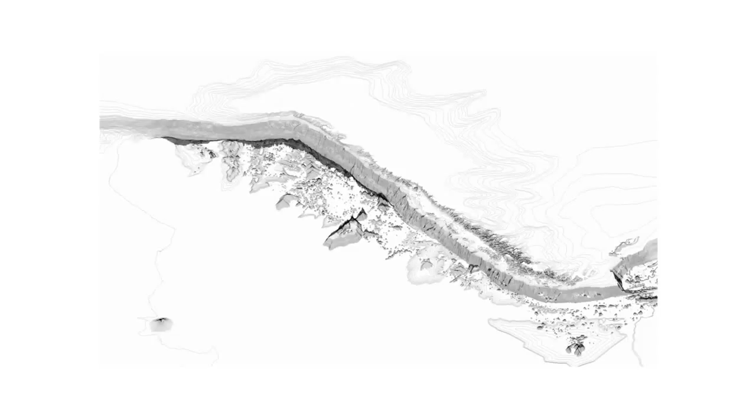We made, for example, this map. This map is the real Chile—not just the flat long line that everybody knows. It's the real one. We have problems in Chile with earthquakes because we have this sea that is really deep, I mean 7,000 meters deep, and we have the Cordillera 7,000 meters high. This difference in elevation, it's the problem of Chile.

The students designed this map over one semester, working out all the levels and everything. One of the maps shows the 'where is here.'

All of this is the sea. And it's so incredible because they must draw in the map from the NASA drawings that they could get, and they draw in all the terrain. And Chile, you could see more or less the Chile. But the beautiful thing here is not about geopolitical Chile, it's about geographical, that we have, that is really important, you know?

Okay, this is the sea. You have 7,000 deep here and 7,000 high here. Here is the Cordillera, and that was an interpretation. But the levels are changed. We exaggerate some distance. We use some images of Superstudio to recreate some structure that you could find in Chile, like a new landscape.

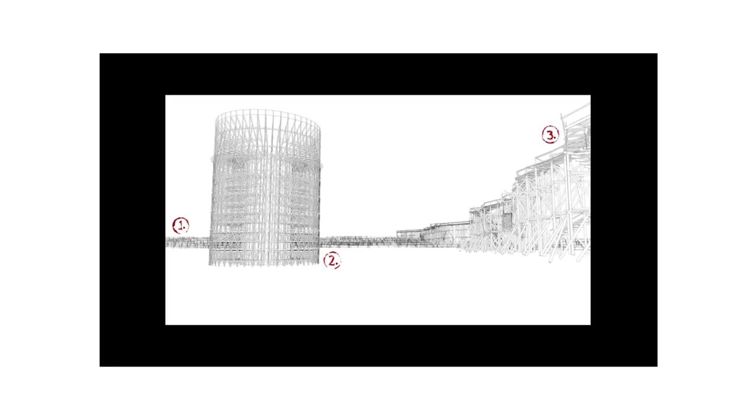Or we use this poor circus family to draw in a football game the map of the circus. Just to say the circus always chooses to be the football soccer.

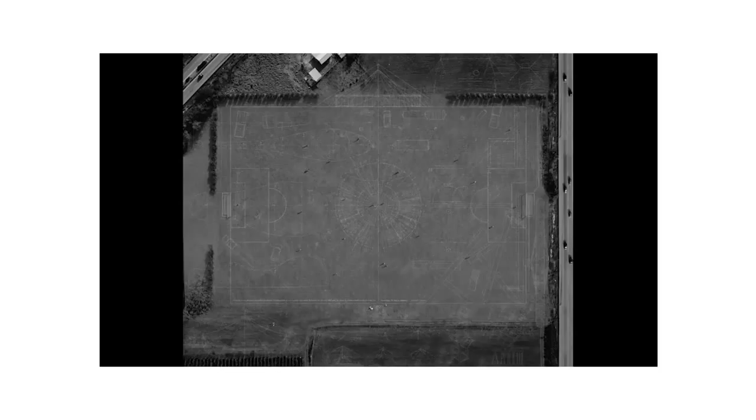Or we made research about the homeless routine that is explicit here. And then if you see the scale of the research, they are really different.

Or we explain the Patagonia, when the hunting kills the giant Patagonia people here, like with the picture, the fresco by Mantegna in Padova, and we explain all the changes of the terrain in there. These have to have an explanation of what is wrong or what is happening in the territory of Chile.

Or maybe we use Knossos plan in Greece to explain fair in Chile with the same language.

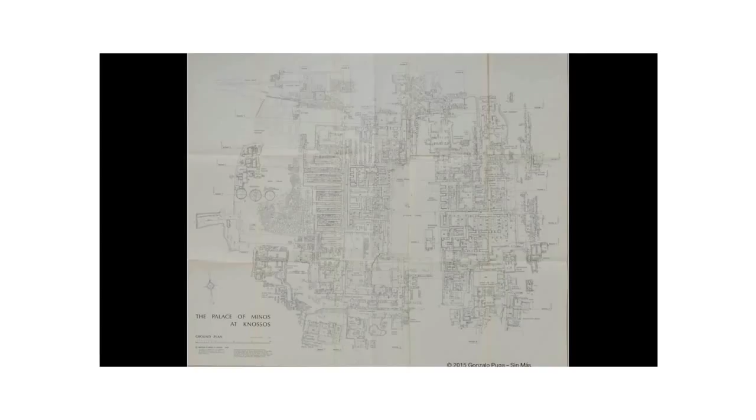Second workshop. You will see some other videos later, but this is the second workshop that I did in ETH with Christian Kerez. Christian Kerez invited me to do a workshop together last semester, and it was really exciting.

And I proposed to do something about Burda magazine. Maybe young people don't know that, but Burda magazine is Burda the fashion, you know. And my mom, for example, made a lot of clothes and garments from these kinds of patterns, you know.

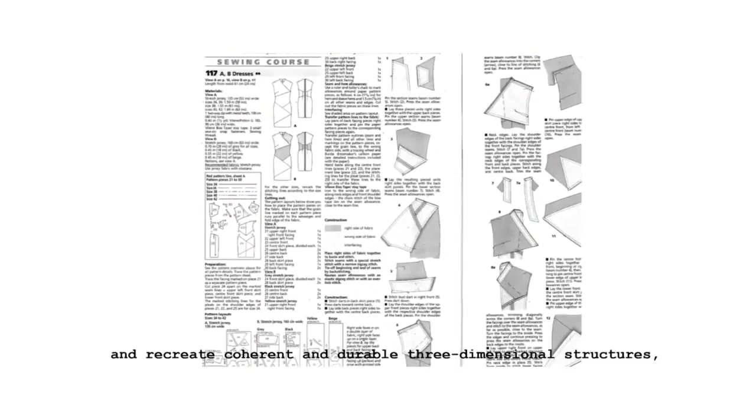Burda is the name of a German fashion magazine. Thanks to its simple instructions on how to use and cut sewing patterns, anyone can take an insignificant piece of cloth and recreate coherent and durable three-dimensional structures, like a dress, a shirt, or a pair of pants.

The charm of this plan lies in the possibility of it becoming a field of interpretation and knowledge.

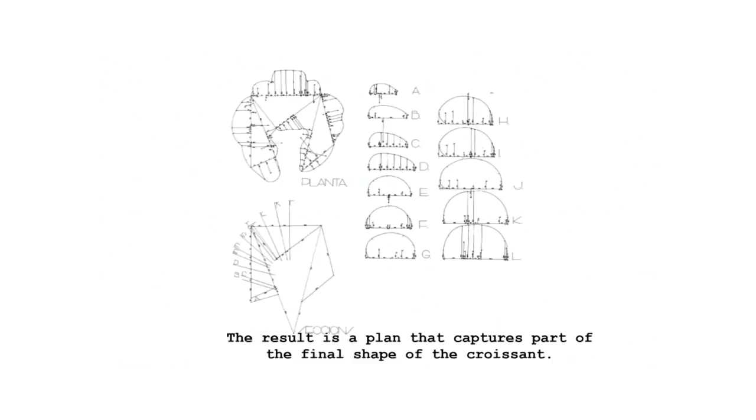Enrique Morales gave his students an exercise called How to Lay Out a Croissant. The result is a plan that captures part of the final shape of the croissant. No one can use these measurements to build a croissant. It lacks information. The real shape is lost among the cross-sections, and the structure disappears in the drawings. This is the same plan that would be used to measure a train car or a building.

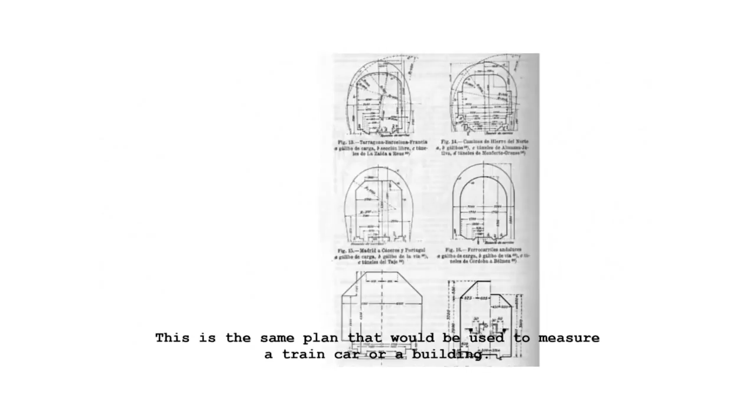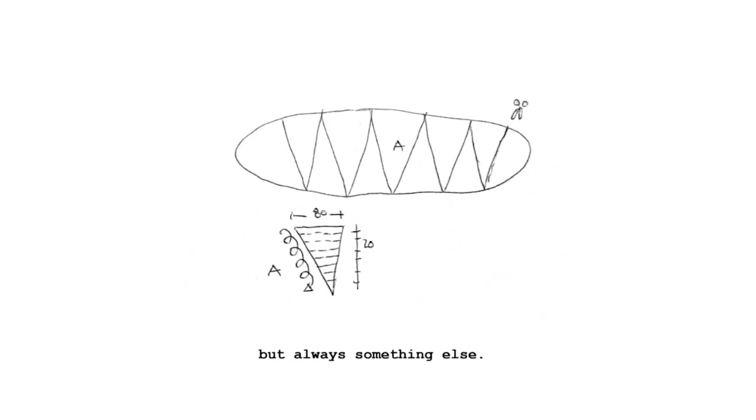But this is how a baker builds a croissant in a kitchen architecture. Perhaps with this simple cutout pattern and some instructions we could build a croissant, but always something else. The shape of the pattern has little or nothing to do with the shape of the final object. It has to do with the construction process.

The patterns and their instructions not only tell us of the production methods, accompanied by measurements and materials, they can tell us of the complete nature of the object. A pattern is the 3D reality of an object, flattened out onto a sheet of paper. Its effect is similar to that of analytical cubism in the photograph by Hockney. A refuge. A flattened refuge.

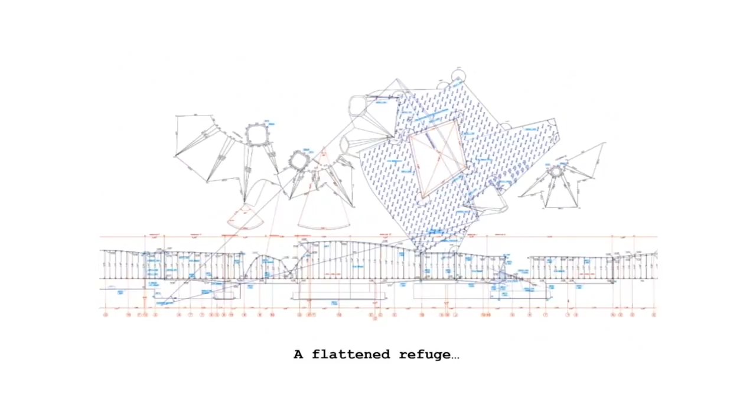This is the pattern of the hand of a giant designed by sculptor Max Stryker. Its shape wraps around a hand made out of masking tape, flattened by cutting it with scissors. The cuts follow the lines of the hand, achieving changes with natural shapes like the lines of the hands drawn by Eduardo Chillida.

There can be many different patterns to achieve the same effect. The important thing is that the instructions must be correct. If they are not, we may only attain a deformed reality. And what we want is to attain a new informed reality.

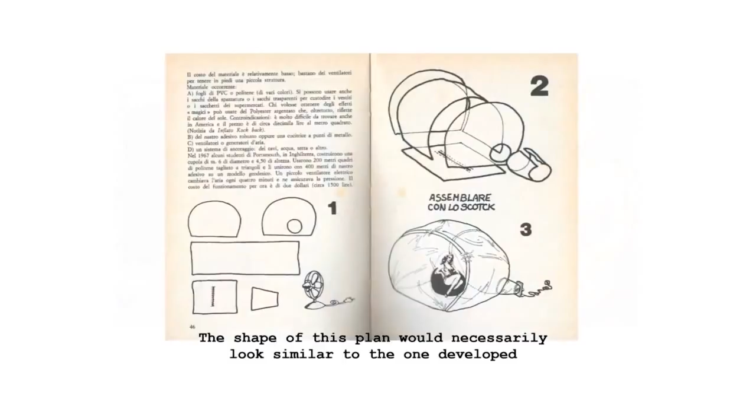What would the pattern of another hand be like? Like that of a cheap blow-up doll, essentially made from the same materials as the hand by Stryker: plastic and air. The shape of this plan would necessarily look similar to the one developed by Ant Farm for an instantaneous refuge, rough, practical and effective, like the blow-up doll.

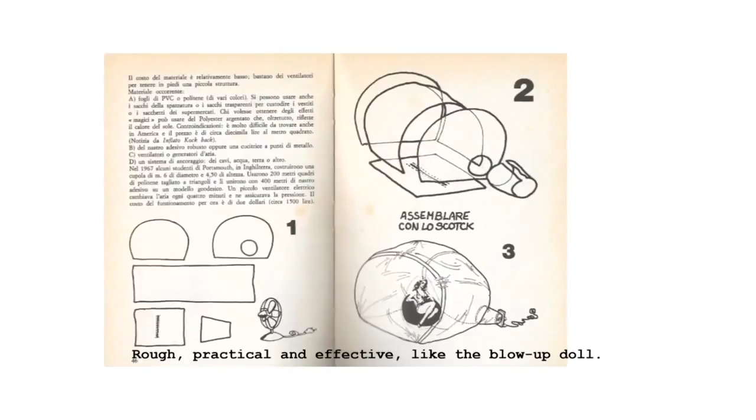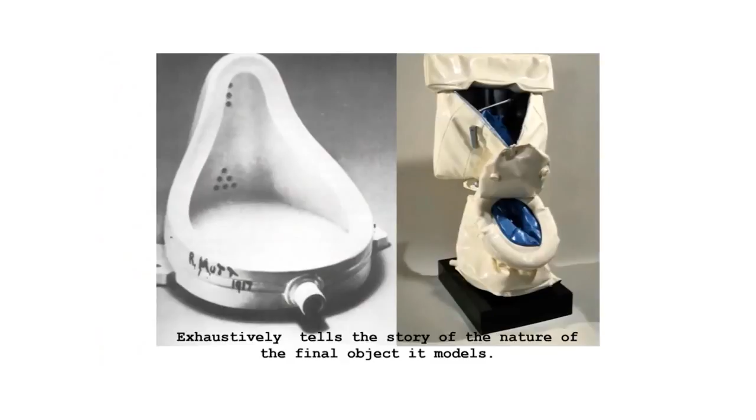This example helps us understand that the two-dimensional plan of a sewing pattern exhaustively tells the story of the nature of the final object it models. It is a construction tool. What does it construct?

But to wear clothes is to wrap up warm, to envelop, hide, support, create imaginations. For Michael Webb it is also to bring together and to isolate.

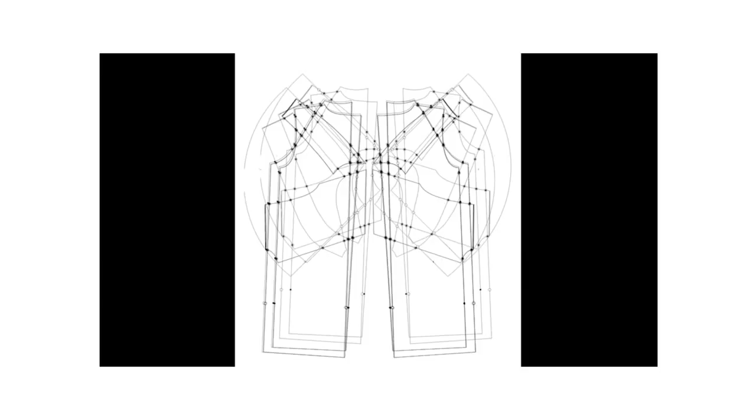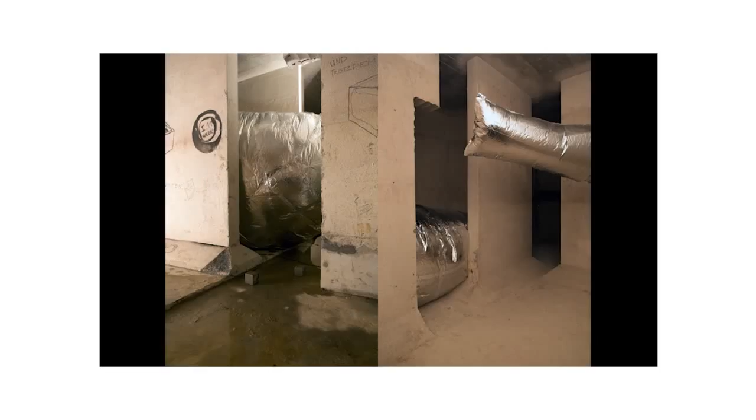This was 2 to 3 weeks, and the second exercise was a hidden space. A hidden space is a space which is inside of another one and has to be hidden. We wanted to build with ephemeral materials, and there was a lot of problem because in Switzerland everything is prohibited and dangerous, you know, and you could not do anything.

After 2 weeks, the student asked me what we could do, because the fire committee or the security committee doesn't want us to work in that way, and they had to do it illegally, you know, everything. For example, this example was underground in the climatization rooms, and they put some volumes of mylar, and you could pass through like a labyrinth of things.

The sensation of this fragile construction with the structure was really beautiful. This was in Zurich, it was built in helium, and you could go inside at this point, just hanging from this bubble of helium on top. Or, for example, this is a hidden space where you're not hidden inside of something, just your head. But inside there is humidity, and you feel real light, another kind of atmosphere, and then you feel really inside another world.

At the same time, we chose to do a park - a Burda park, we call it - but it's something in the middle of a building and a park. It's just to think how we could express our relation with nature at the end.

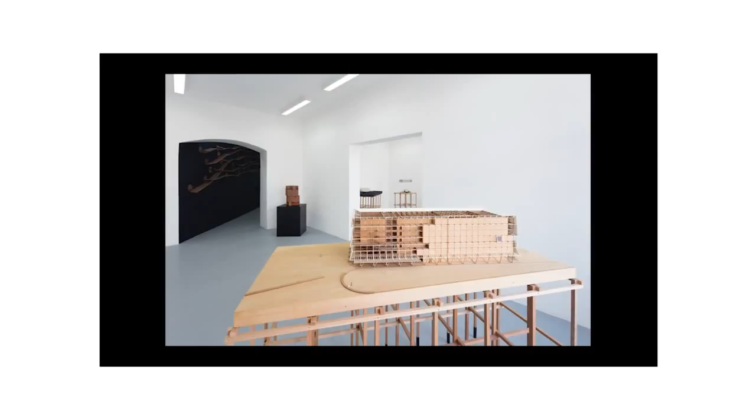This is about my bestiary, all of my projects, the last one from 2010 to this time, and this is one project I will show you, called Dead at Home. It's a small chapel - this is the theater I will show you later. And these are some drawings: Serpentine Gallery, room 2 is a small house, the house for the poem.

And at the end we have this family of objects, all of them. I always do a conference with this exhibition that explains the relation between them. There are real projects and there are objects that will never be built.

This is my last one, made for Gallery Ma. It's called Kipwi, the name of my first tower - the tower that I will never build. But I will do a video with this doll named Kipwi, fighting with Godzilla. I could not do it at that time, I still have to do it.

The next exhibition will be in September. It's about Enrique Miralles. It's really important for me to have a relation with architects that I really admire. I made contact with the Miralles Foundation, with Benedetta Tagliabue, and said I would like to show the Inestable, the table by Enrique Miralles.

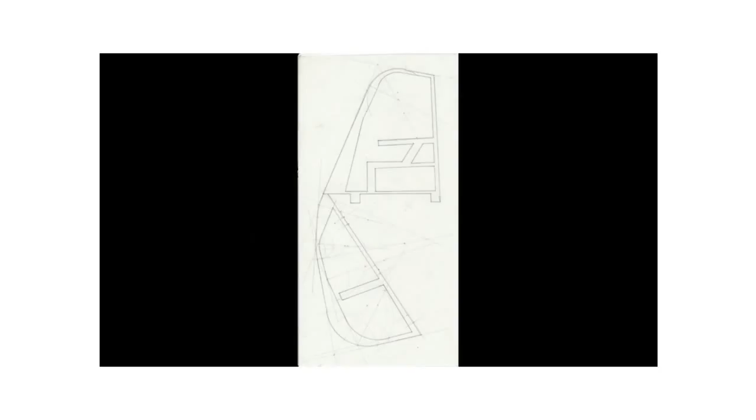We received this beautiful drawing, made by hand by Enrique Miralles, and we made a research about this building. For me it's a building because there are many parts of the drawings that don't exactly match how it was built, so we had to choose some ideas, but at the end we just built it. This is the real one.

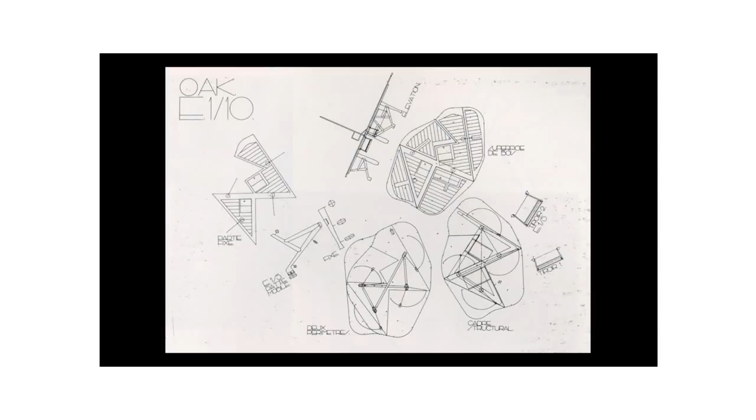This is the table that we produced in Chile. The name of the exhibition will be Inestable, made in Chile. This is the table - it's so beautiful, really incredible. I really feel that just the materiality could give you the real sensation of things.

The other things are just talking about it, just to think about. But the materiality, you don't need to think - it just is. And the third exhibition is really beautiful for me.

The third exhibition we're going to do will be in May of '68 at the ETH school institute in Zurich, with Hans Ulrich. It will be really beautiful. The name is Cloud 68, about radical architecture. We have a collection of radical architecture from '52 to '74.

We are going to bring this European architecture - drawings, lithographs, engravings, many models that we have in Chile - back to Europe, and make this exhibition in April '68. They will be just papers on a cloud, and Hans Ulrich will give us the voices of the people who were there at that time.

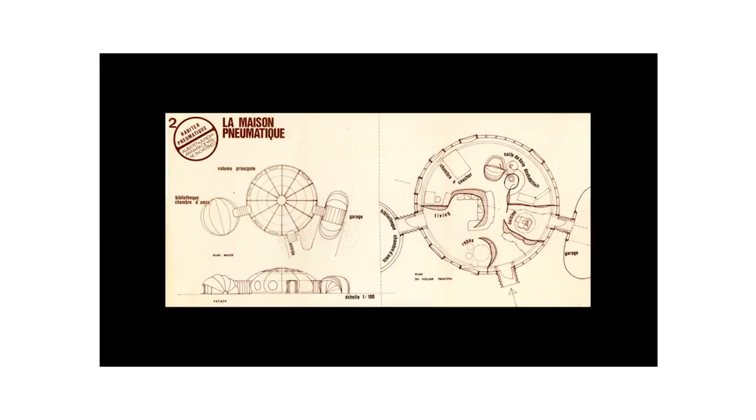We are going to have voices on paper of the Situationists, Constant, and about Superstudio, Archizoom, Archigram, or Utopie from France - more or less 300 pieces, 250 pieces from different figures like Buckminster Fuller, etc. This small collection will be here, then come back to Chile. Because, as we discussed today, for me the important thing is to bring architecture to Chile, not to export Chilean architecture outside.

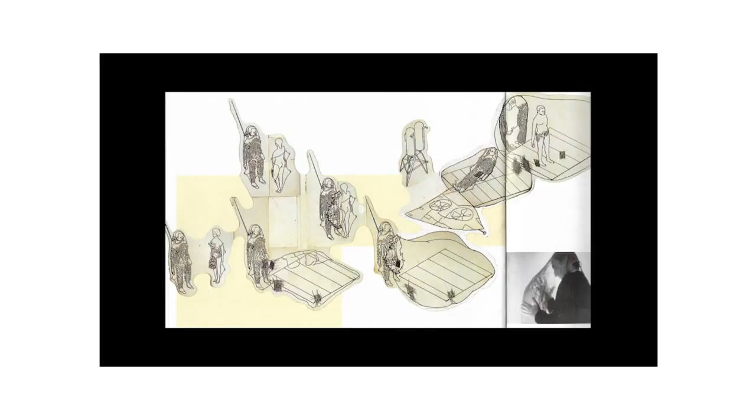Everybody thinks you could travel around the world and it's really easy to do. But in Chile, we have more or less 40 schools of architecture, just middle class students, and these students could not go far away. So my opportunity is to bring architecture to Chile.

And this architecture is just paper. The paper for this kind of architect was really important because they don't build so much. I think the exhibition will be so beautiful, and you must go there, because for you it should be easy.

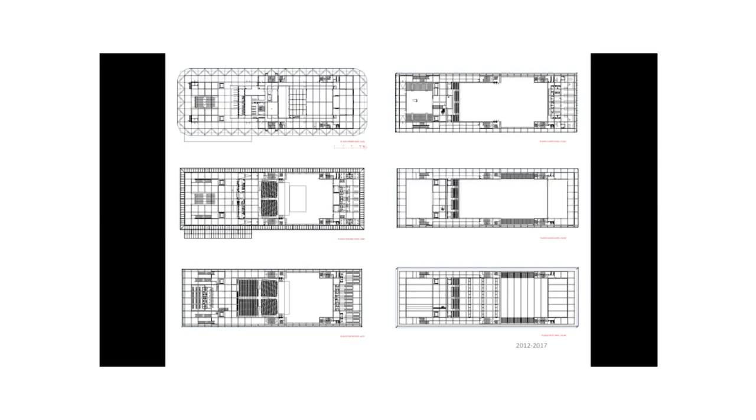Then the other activity that we have in our studio is the site visit. At this moment we are building 3 things, and these occupy a lot of our time. At the beginning it was really terrible because I spent too much time on site. Right now they are almost finished, so I spend a little bit less.

The first is the theater that maybe you know from the pictures, the Teatro Regional del Biobío. It's a real simple project, but I like 2 aspects too much. It's a big box, a frame of wood, more concrete and wood. It's a real classical plan. It's not really important, but it's a hidden theater. You have a structure of concrete, and you hide the interior of this space with just 1 layer of PTFE.

This was for 2 reasons: we want to bring to the people the weird spaces and the strangeness from the beginning, not only when you arrive at the room where the performance will be. We want the building to appear like a performance itself, and with that we want to lose the sensation of being in an institution, in a real theater. Then we cover this with a membrane of PTFE all around it, just 1 layer without double facade, etc. And we made a big circus at the end.

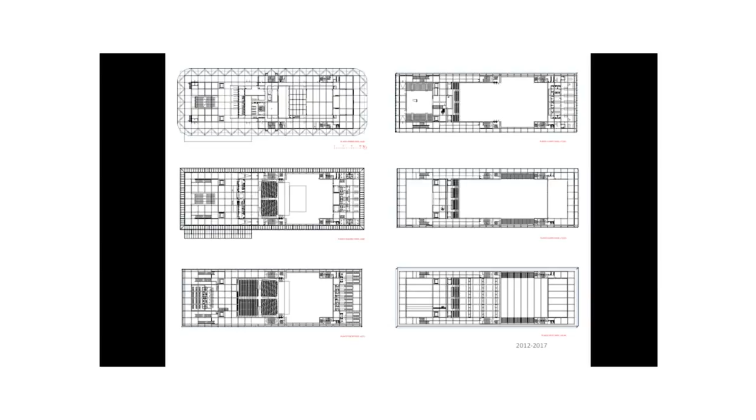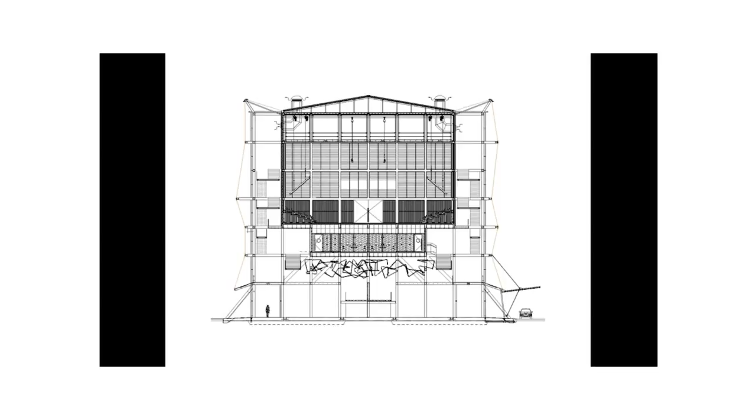This is the section. This is the membrane they start to put in next month. You have all of these spaces just with the circulation, and the whole thing just with 1 layer of PTFE. That is really different, the contact you have with the exterior and with the weather. You really have a fragile, big, fragile construction in the sense that you are weathering, and I feel that will be really wonderful.

And the second thing that is really beautiful is that this building doesn't have foundation. If you see, this slab is 35 to 50 centimeters wide, not more than this, but there is no more foundation than this. The building is just near the river, and this building was built in the middle, in the center of the earthquake of 2010, 8.8. We resolved everything with this lightness, pillars, columns, and beams. But the real foundation is here, on the first floor, that you will see now.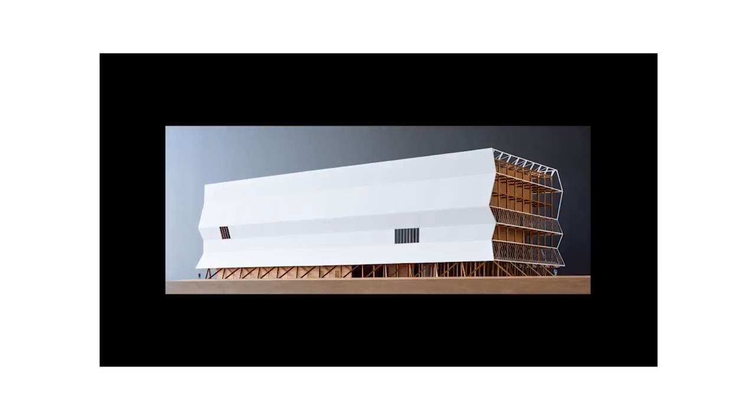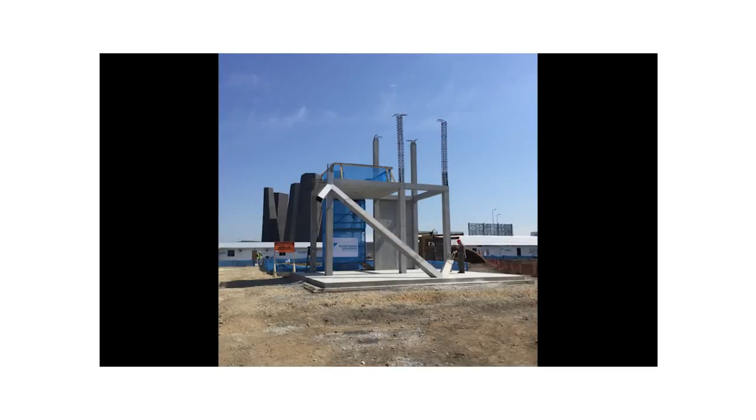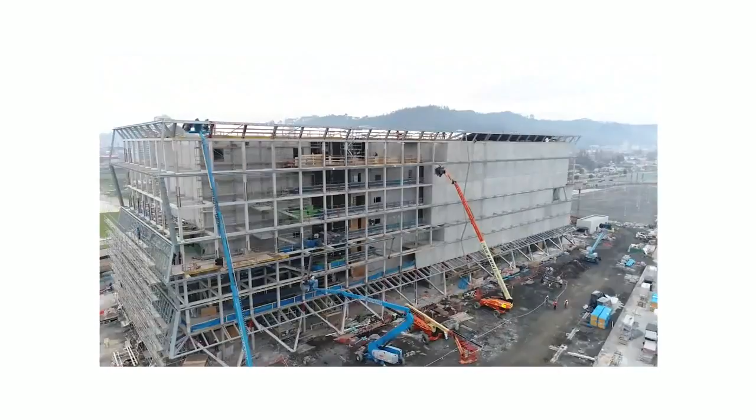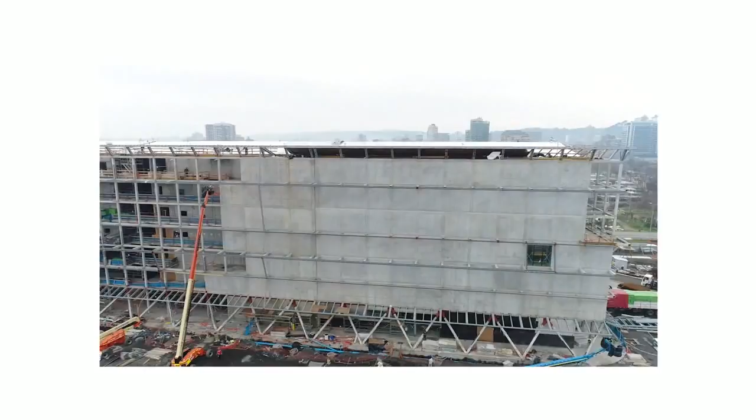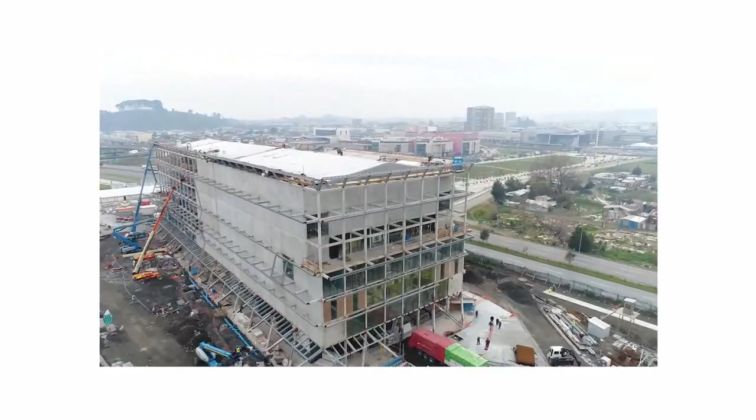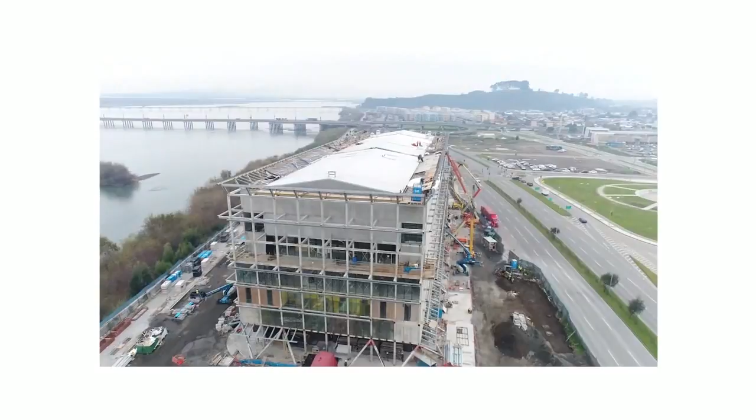This project comes from 2012, when we won an international contest, and they are still working on it. I think it will be finished at the beginning of 2018. The scale of the volume, the square meters are 10,000 square meters, but the volume is really, really big, because we want to have a relation with the river more than with the city. I think it will be really successful.

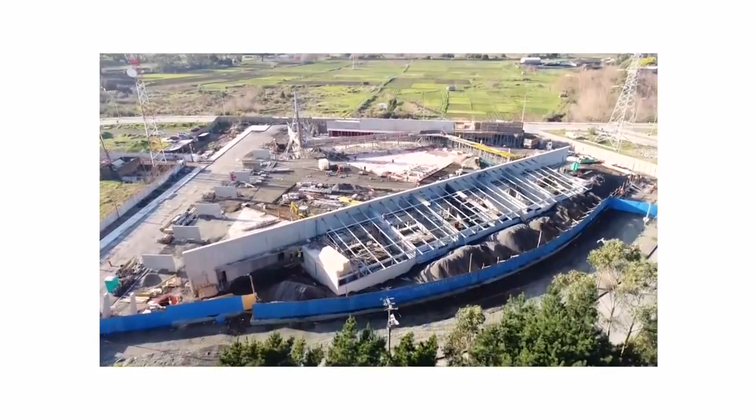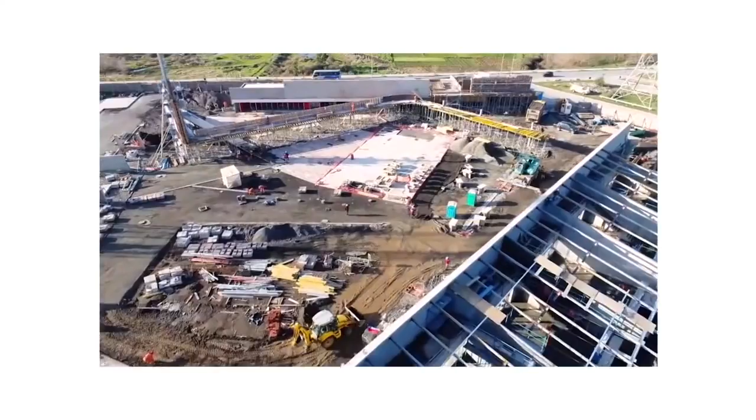Here we have some rooms for the community. Here we just need to close this space, so we put two big walls here and here. These walls will be brown, all of these will be brown, and this wall will have graffiti all around, which is really easy in the neighborhoods.

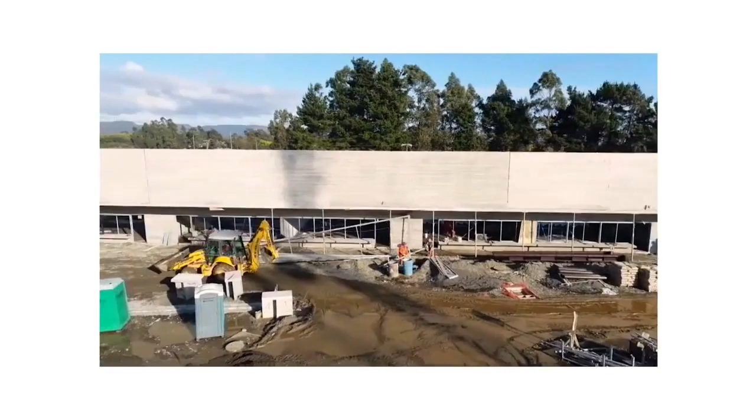The people do this kind of thing, and I'm going to have a soccer field, and games for children. And we made these big ramps to go to a building that will be here, but they don't have money and they're never going to build this. It's going to be really beautiful because it's just a piece of nothing, just for in case of the people, and it looks really beautiful on the landscape because it's really stupid.

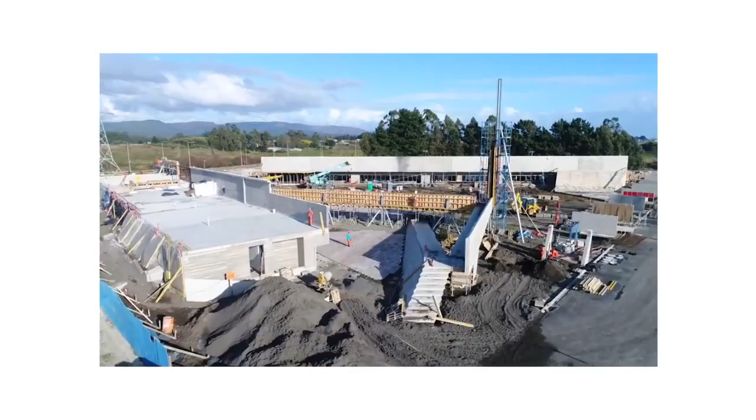It's just a trip around, and the people here could see the soccer or other kinds of games and control the children, etc. And we have here big steps that go to nowhere, because it's for nothing too.

But at the end, this is what happens with public space: the people use the furniture, use the steps of the church, etc., in another way, always different from what you proposed. And this is the project right now, just one week ago.

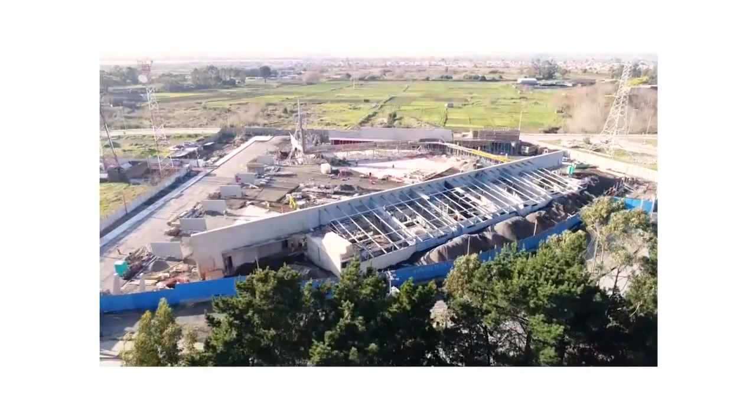This is the ramp. You could do this, and this here will be a stair, and that's it. This is the red building - it will be absolutely red and really crude concrete.

These are some walls for a fair of vegetables that they sold - they sold vegetables and many other kinds of things. Oh, it's not too good.

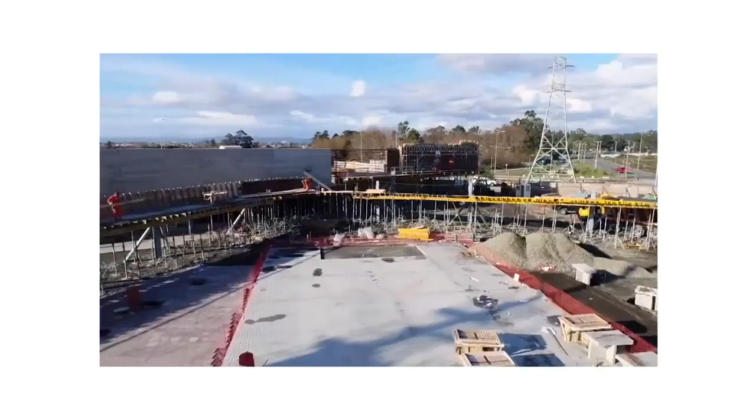This is a graffiti. Here the people will write a political graffiti, all of this. This is more or less 80 meters.

And here we are going to have the fair, here, with one membrane all around this. Here we have a theater, or where the young people go just to talk or something. And that is the space - to be inside is really beautiful, I think.

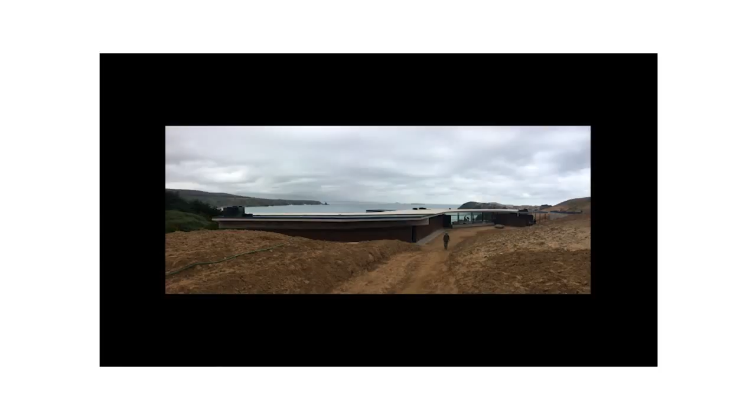This is a house that we just finished, but I will show you just two pictures. It's the most beautiful part of the sea that you could find. Looks like Greece, but it's Chile. It's incredible - this bay is absolutely incredible.

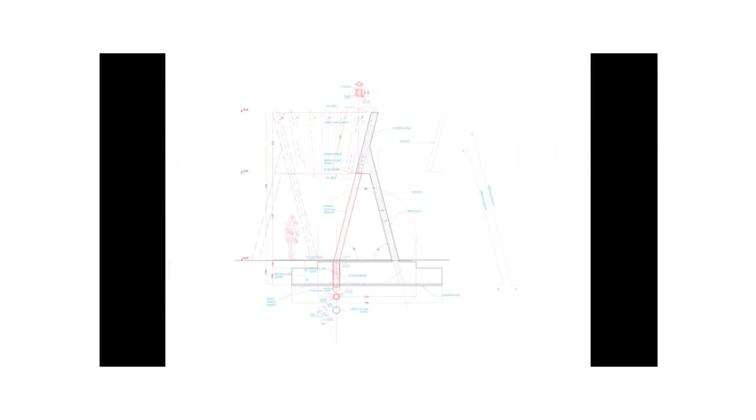For this, but this will never be built. We spent 2 years and they told us they will not do it. And this is the structure.

The beams are here, and the beams move around the space and go ahead with this angle to arrive at this place. And it's really beautiful because the beam is really stressed, and then it's more structural because they don't work in a static way. And when the earthquake comes, it's really resistant - it's like when you do the same thing with paper, more or less.

But at the end, the space is like this. You could have some tables and events and people walking around this room.

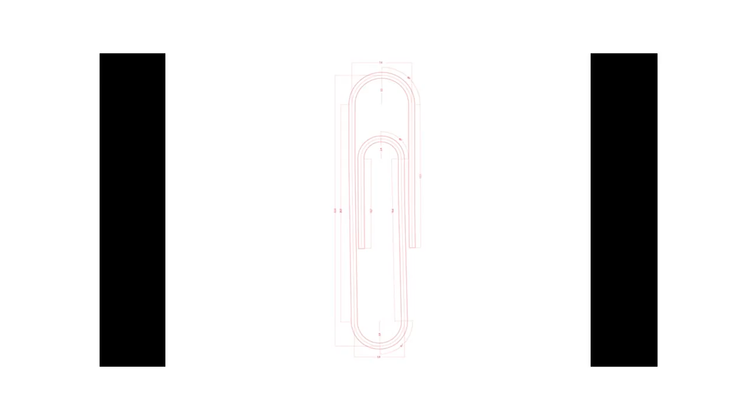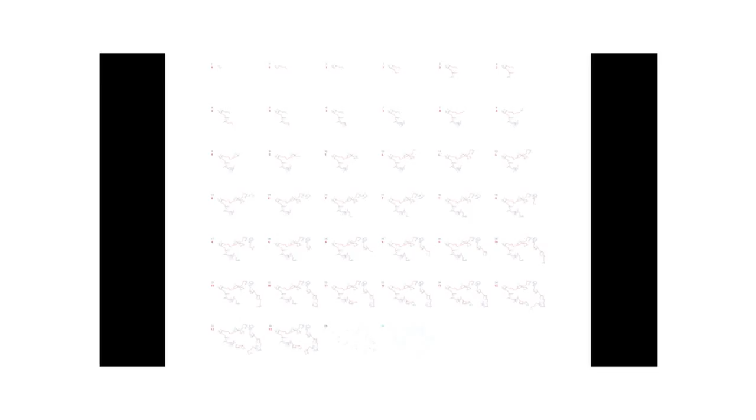This is another project where we won second prize. It's a clip project - we took a clip and moved it through space in two versions. One version is a rotation; you couldn't see it really well, but it's a rotation. The other one is a clip that advances in space rather than rotating. And this is the plan, etc. We won the second prize.

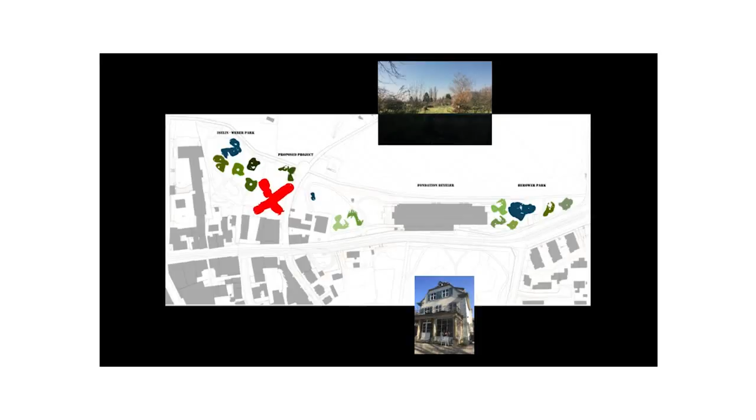I'll explain it easily. You have one park here and another park here. The pavilion of Piano is here, and you have to connect them. My idea was really stupid - to have a box of wood on top, with a really big structure, not really fine, but really strong - more than strong, I could build it again. The project would be here; here was a domestic park, and here was a park more for public use. We made this our relation with the park, just jumping the problem.

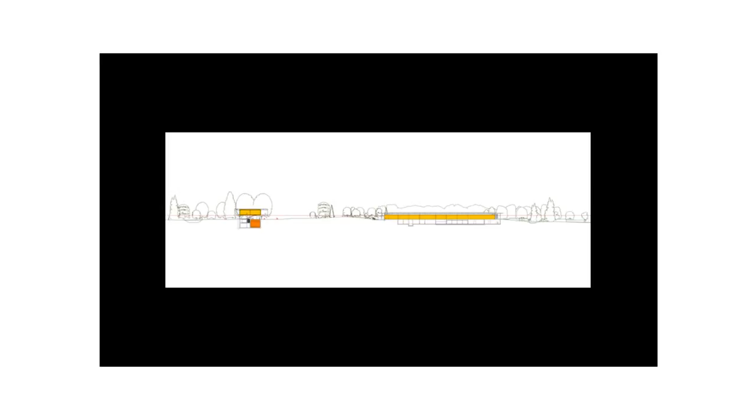This is the program, which I won't show you because it's too much. But I understood this was my first time building something - I tried to build something in Europe.

It was so funny because I understood that in Switzerland you always build two buildings - one inside to protect you, and one outside to protect you from the exterior. Having two buildings, one inside the other, gives you too many opportunities, I think, in the end. And it's the opposite of what I'll show you in a project in Lima.

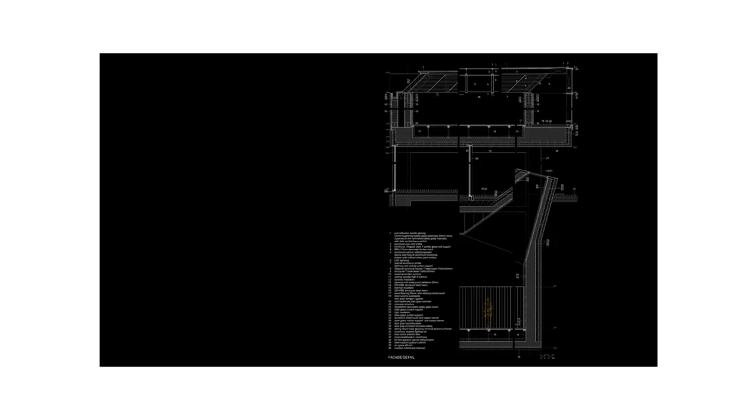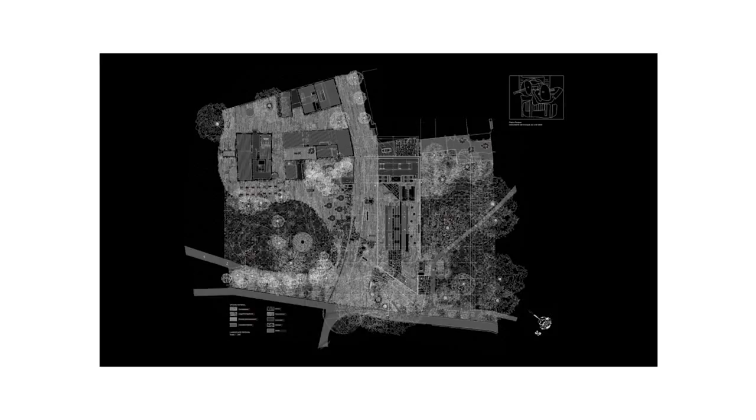This was our plan, and this was one part - all of this was designed, with the stone path running through. We wanted to eliminate the real building from the first floor, and I did it this way: the box there, the box from behind, and from the landscape - and this was all in time.

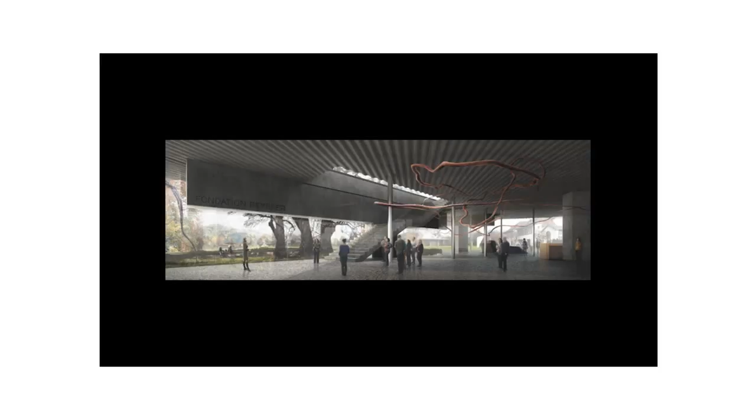The structure is huge beams, and I love this kind of sensation of a room - more than an old building, more than something really new. With some canals here, the slab, the ceiling, is like a wave that moves. You have this ambience where you don't know if you're inside or outside, but not because of transparency - it's because the inside is strong, like an infrastructure you could find outside.

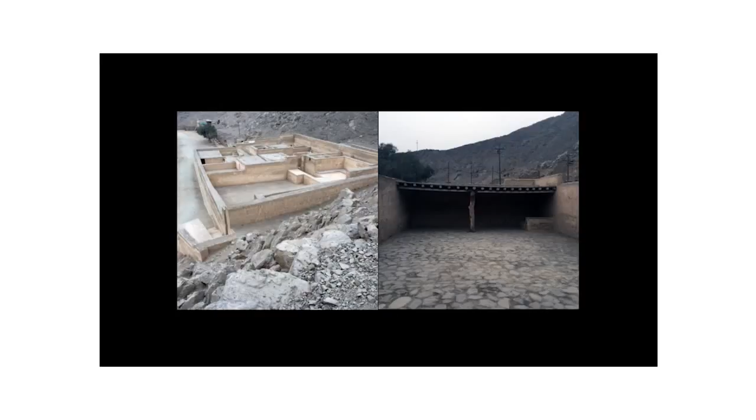And it's absolutely the opposite of Lima. In Lima, Peru, I started to build a house for a client who has 1,500 pieces of these - ceramics from Peru, about this size, really about 90 centimeters. They are really, really big and beautiful, with beautiful colors. What's beautiful for me in Lima is that they don't need insulation or waterproofing, and when they put in windows, they place them separately because there's no problem between exterior and interior - you can do a really primitive construction. I took some images of these and started working with them in the house.

The idea comes from the surroundings - this is a small house but looks really huge, so the idea of monumentality is really important in this project because I have a problem on the side, which I'll show you. The other thing is the idea of shadow and the idea of boxes and platforms. They need just this to live - these plus shadow, and that's it. They don't need more. And the site is this.

The client had called 5 architects before me to do a house, and he wanted a house of 400 square meters. The first architect that came made a house of 1,200 square meters. My client said, I don't need 1,200 square meters. So they said, let's reduce the surface and start to build. My client started building and made these 2 big holes in the middle of the beach, which was terrible for the neighbors. But at the end, this architect could not reduce the square meters and arrived at 800 square meters.

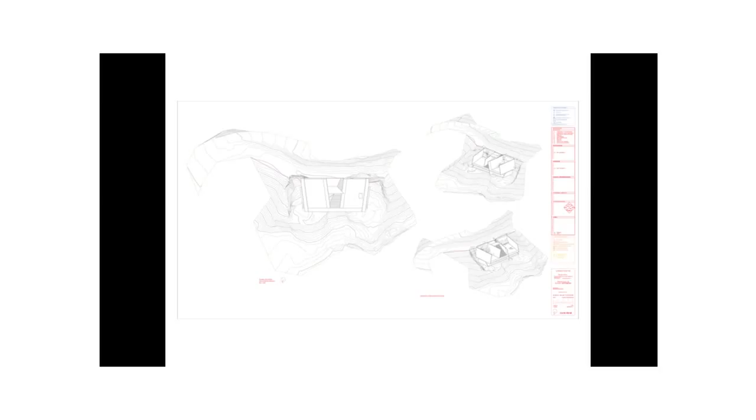Here you could see the holes that I still have there - I have to put some earth in because it's still there. The holes are really, really big for my house. My house is so small.

We made 2 boxes, 2 patios, one here and one here. You arrive here with the car and go down there. This is one patio, a studio for him, and this is the other patio with a living room. Then you go down, all the way from outside, never from inside. You have one room here and one room here.

It's really easy to understand the problem, and the shape is like this. The sensation is always to feel protected from the neighbors, because you never know what's going to happen there. It's like these images, the same ones I could find in the museum before - trying to have small boxes that just look into the landscape.

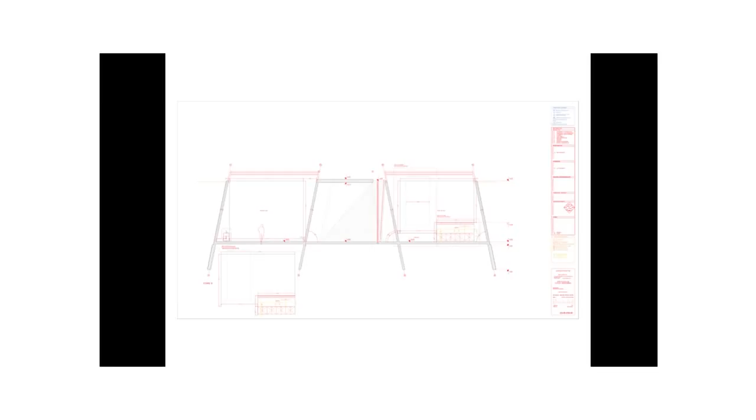This is the section - it's just a slab, I don't know, of bamboo and black concrete. All of this is black concrete, raw bamboo, and a slab of 5 centimeters of concrete over the bamboo, and that's it. This is the house on the landscape.

The sensation is about not having a scale. Here you have 2 meters, 15 centimeters - it's really low, but the bedrooms are bigger, and you have shadow with the small membranes. Here is one patio and the other patio is there. This house will start building next semester.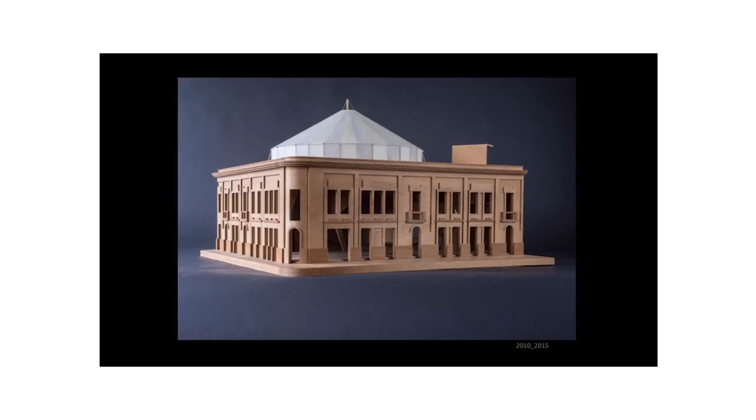Well, in 2014 Julia Peyton-Jones arrived and said to me, let's go do the Serpentine. And at the end, we arrived at this object that I never thought someone really crazy would want to build. I created a lot of this object because I would like to build on the idea of this one, and then here you have the same idea.

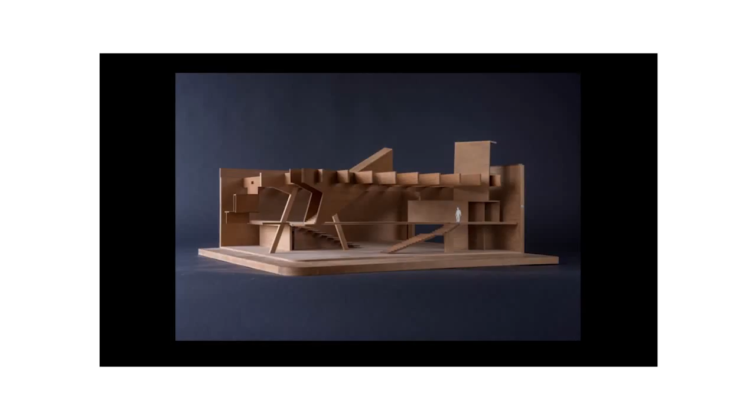You have a neoclassical facade. I mean neoclassical means it's a fake one. It's a real fake because this facade comes from 1940, and it was just for a sale apartment inside, and that it was destroyed.

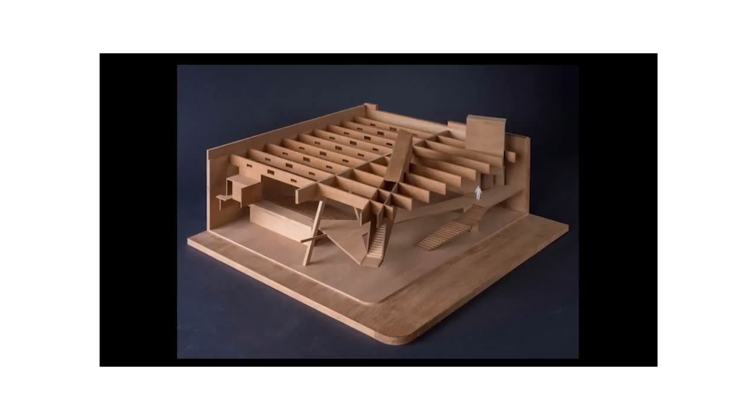Inside we put a black room for dance and performance, experimental dance, performance happenings, that kind of thing, and a small theater. On the top, the local government said we could not build anything, so I said okay, let's put a circus, because a circus is not a permanent structure, so it's not a real building. We put that, and it was really beautiful because the circus is still there. For me it's the image of Teatro del Mondo by Aldo Rossi - more or less the same idea, to have this image inside.

At the end you have a neoclassical facade, a real contemporary room inside, really dark, and on top you have this circus. You have the most primitive structure you could imagine, and inside a contemporary structure. This dialogue in between is really beautiful, and it proposes a new kind of sensation of the space. This is the interior space, all painted black, crude concrete.

That's important - we didn't design the circus. We bought it, you know. We don't want to be architects for everything. We just bought the circus and that's it, and put it on top of the building. I think it's something really made.

This is the access, this is the room, the black room. It's 30 by 30, a small room but quite big for performance happenings. Everything inside you could move, but it's not an innocent space - it's a space that is really strong, and the people who do something inside have to know what they're going to do with the space proposal. This is the stairs that go up.

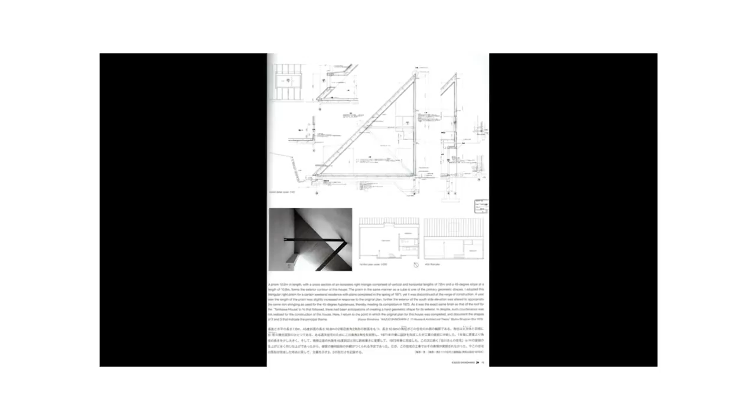The same strategy was used with this house that I will build next September. I'm starting to build this - it's the Prisma House by Shinohara, one of the most beautiful houses of Shinohara. Shinohara always shows this picture that suggests a cube, and this section suggests this is one space, but he never showed this space - the real cube is here, but this is an addition.

And the structure, the symbolic structure that he has in the interior, and at the same time, more important for me, the lightness of the house. At the end I rescued this and built this. I built this but put it in relation with this house, which was one of my first houses - I copied this structure, took out all the other elements, and put together these two: the Prisma House with Shinohara.

This was my house, and I put both together in a really beautiful terrace. You're just seeing a beautiful volcano, and this is the real landscape - full of trees. This is just tin, there's no insulation. It's really crude architecture, really a dry one.

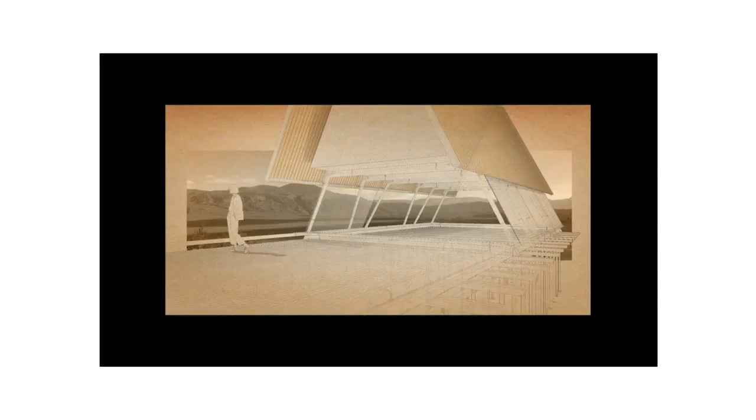It's the base of this project, this tension between this and this. A client came to me and said, okay, I would like something handmade, like the Serpentine Gallery, really handmade, that you feel the materiality of, but I would like lightness, for a show for 900 people.

But the show event, the duration of the show, is 8 minutes. 8 minutes, and then you have to make a structure. It's about 900 or 1,000 square meters for 8 minutes, and indoor. And then I say, okay, let's go try something.

And the real idea was to rescue the materiality of these things, you know. But at the end, I use this. I offer to the client to do something stitching. We are going to use a parachute membrane fabric. It looks like silk. It's really, really beautiful. And we are just going to stitch it, not glue in between them, just stitching.

A big company, and we are going to try some ways of stitching. It will be like this, more than this. This was a reinforcement we are going to do in some places, but it will be like this. And I think the sensation of silk will be so beautiful.

But the problem is the shape. I was really afraid about the interior space, because the interior space that they proposed me was really ugly, but so ugly, it's so strong. And then I would like to disappear inside of this volume.

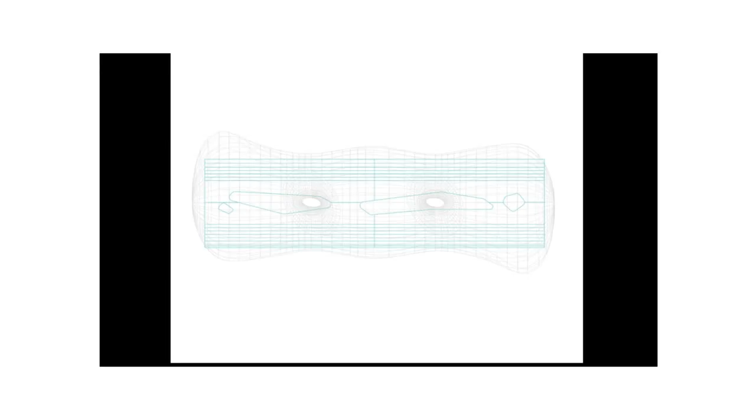And then I create a bubble of this membrane. And I lost a lot of time, more or less one month and a half, just trying to not go inside with the structure, with this.

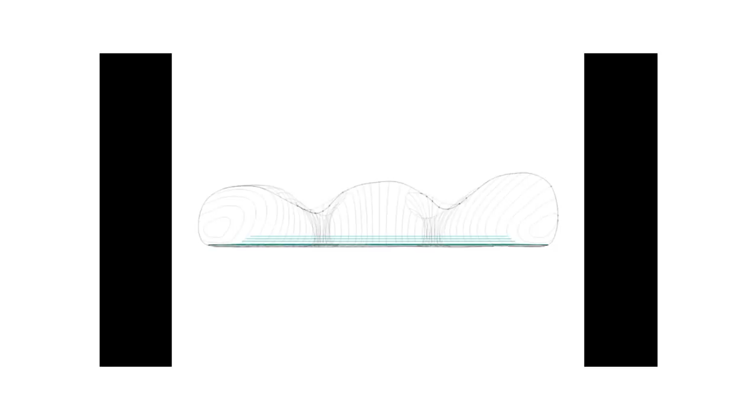And we made a lot of plans. This is the plan, and this is the plan. And then when you go inside of the bubble, you just have the sensation you are in another kind of world.

But one week ago, I felt this strategy was really stupid. Because why do I have to design for one month and a half some shape, when the event came in 8 minutes? There's something that is not really a coincidence. It's something that is not really smart.

And we spent a lot of time trying to do the stitching, trying to just fabricate these, and to avoid keeping out the structure of the place. And we arrived at this shape that is really beautiful. It's like an art sculpture. I love this shape, but I feel this shape is stupid.

Because we use the technology, but to be really contemporary right now is to jump the technology, is to use common sense. And common sense says you could not design for one month and a half a building that you are going to use for 8 minutes, you know.

And with common sense, we arrive here, we have the plans, we have the pattern, the Burda pattern, the pattern that they have to cut, everything. And after that, I start to think again.

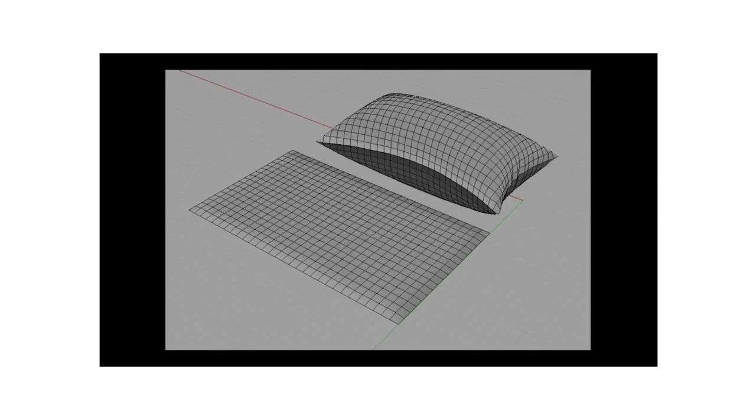And I said, okay, let's go do a bag, just simple like a bag, two flat planes, and then blow up. And that's it.

And I don't care about the shape, I don't care about the structure, because the shape will be modified by the existing structure. And this is easy to build, easy to understand, and the shape at the end and the atmosphere inside of the project will be more or less the same, but more weird, which I like too much.

And then we made this, just a cyclic model, and we said, okay, let's go put the columns inside, and the column will do it like this, and the shape will be really, really okay.

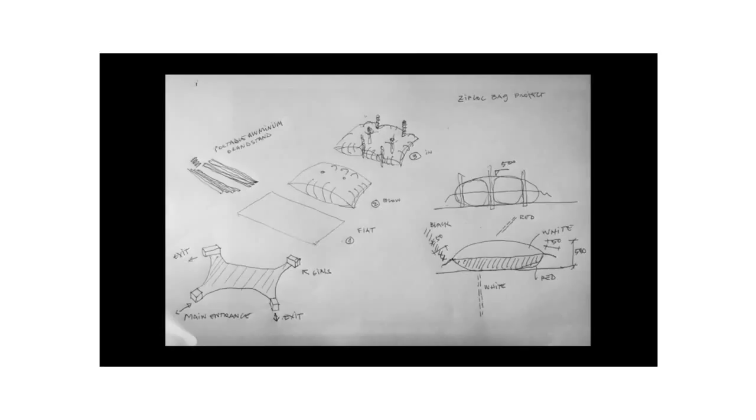And this is the plans. It's really simple, because the engineer was really afraid, because they had to calculate so much about the other shape. But with this, they say, oh, it's really simple, and they don't have to calculate anything, just the pressure of the ambience, of the interior ambience.

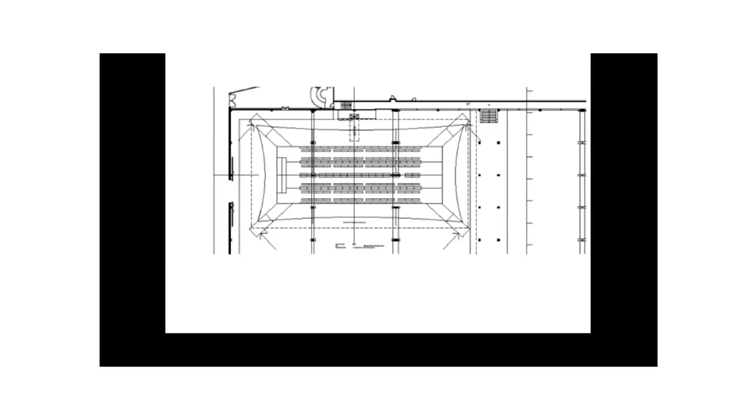And this is the section, and this is the section with the columns, and that's it. This is the plan, and this is the model, and this is the project. And we're going to put 4 entrances here, and that's it.

And here we are at the end. I built a bag for 900 people who have to go inside, and it's really beautiful. It will be really beautiful to see the people inside of this bag of silk.

This will be the last project that I will show you. The place is between Zaragoza and Barcelona, in Matarranya.

It's a solo houses place, and here you could see the house by Pezo, the other architect's houses. The client told me he wants to turn it into a hotel, and I presented this concept four days ago, and he was really happy about it. I think it will be built next year.

This is the landscape. It's a hill, the top of the hill, and you can see this beautiful forest of pine and olive trees there. The landscape is really incredible.

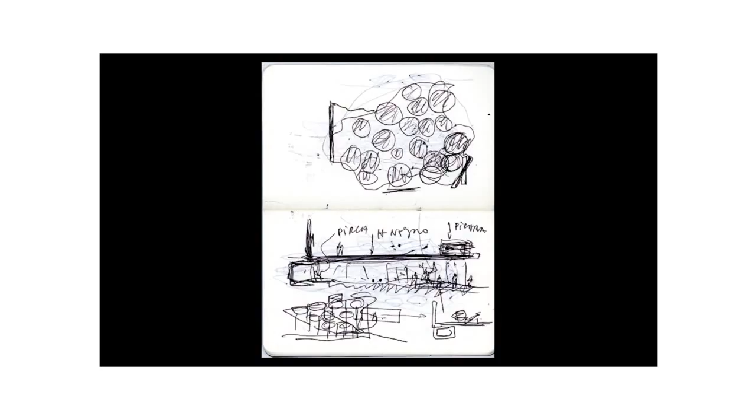There's no shape yet, and that's not important. The project will be a slab of black concrete, 30 centimeters thick, suspended about 40 centimeters above the floor—never touching the nature, just for walking around.

On this slab, which is more than 150 meters long, you have 30 rooms. But the rooms have a condition that's really important to me: they are concrete cylinders, really shiny, but the key structural material is not the concrete—it's the glass.

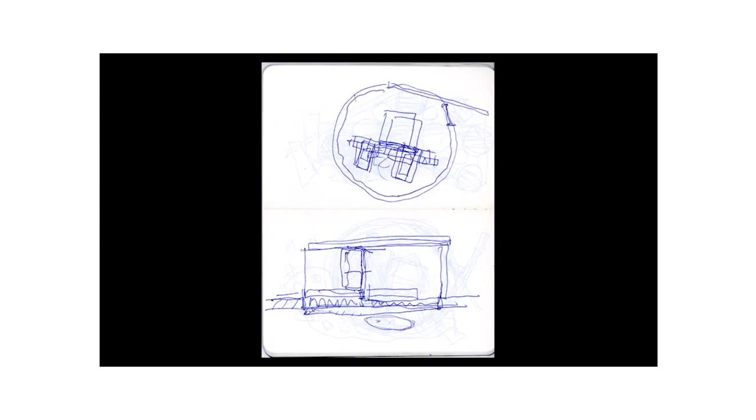These rooms have a 6-meter diameter, but the glass sits outside of this diameter, just covering the perimeter of the room. This is because I need to create a distance, an impossible proximity with nature and with the people who visit—an enclosed, hidden space within a transparent space—to give the client and visitors a sensation of distance, but at the same time a sensation of proximity.

These are some sketches, and this was the plastic model—one of the models. This is the slab. You see there are really different shapes or forms in plan, because it doesn't matter.

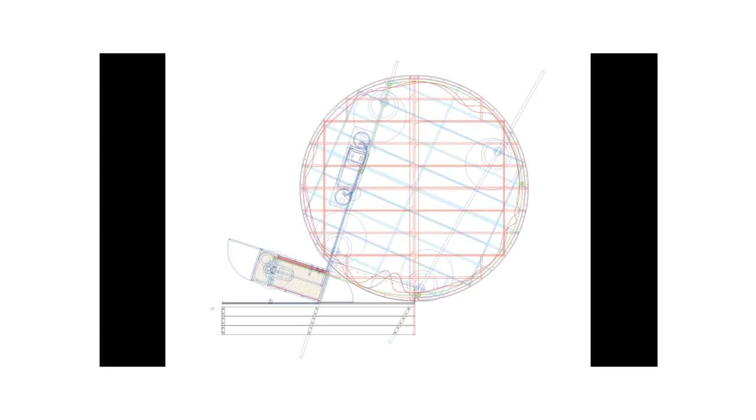Then you put the rooms on top. When you place the rooms, you get these glass volumes—I can show you the beauty of the glass in the plans too. Here's the plan: the rooms, some of them are just glass, meaning inside there's nature. Some others will just contain fire. Here will be just air, nothing. And here is just forest.

In the middle of this landscape, you will just find these glass volumes. The real structure is the slab that moves around the landscape, but at the same time you have these glass rooms—sometimes capturing a human body, sometimes capturing nature, sometimes just sculptures or air, or nothing.

The hotel will be like this—here you have the glass volumes, really opaque. And here will be an outside cinema, with the landscape around it.

This will be the aspect of the rooms—something in between a cabin, a room, or a hotel. It's something hybrid, you know?

The beauty of the slab is that it lets you be in a real urban space while still having proximity with nature, which is really important for everything. This is the landscape of the project at the end, with this beautiful view—I think it will be like candles in the middle of the landscape.